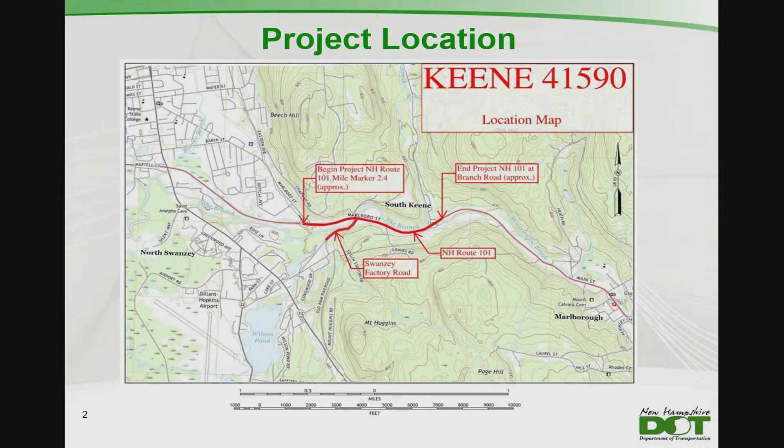It starts just east of Optical Ave, progresses about 1 mile just past Branch Road, and also encompasses a portion of Swanzey Factory Road. We're looking to improve the intersection there, address the bridge condition, the roadway condition, deteriorated pavement, and drainage challenges on that segment of roadway.

So as an agenda for tonight, we have progressed through a couple of these aspects: welcome and introductions. We'll touch a bit more on our project development team. We have worked and collaborated with folks from the City of Keene, the town of Swanzey, and the public, including the abutters as we progressed along. So we'll give a project overview.

We'll talk about our studies to date, which there have been many. We'll talk about our preliminary design, our concept that we've developed through public outreach and coordination with the project work group. We'll talk about our construction plan and our schedule moving ahead.

As I mentioned, my name is Dave Smith, New Hampshire DOT. Not with me here tonight is Hans Weber, our design engineer from New Hampshire DOT. I introduced both Alan and John. We also have Rob Faulkner in the audience, who works for CHA as well and has been integral in our efforts progressing forward with our CHA team.

We've also had great working and collaboration efforts with Don Lucier, City of Keene Public Works Director, J.B. Mack, Assistant Director from the Southwest Regional Planning Commission, and from the Town of Swanzey, Stefan Mayhew, Assistant Town Planner. This is our working group, and it gives us that local knowledge and insight we need to guide the project from a scope perspective, acting as our local support to make sure we're getting the right solution for the needs along that corridor and for any projects we have at the DOT.

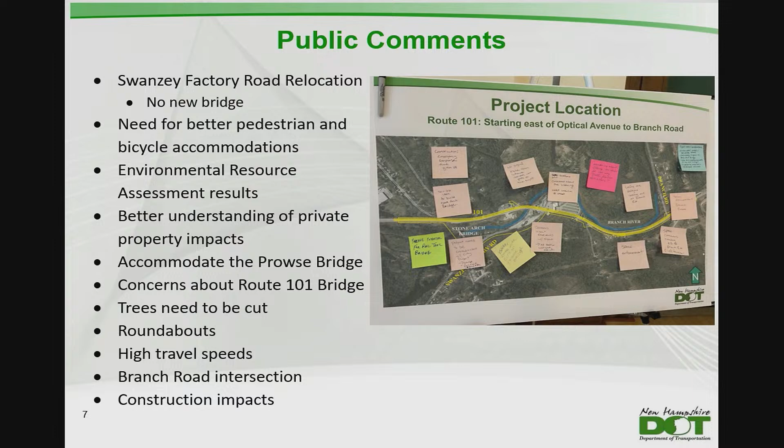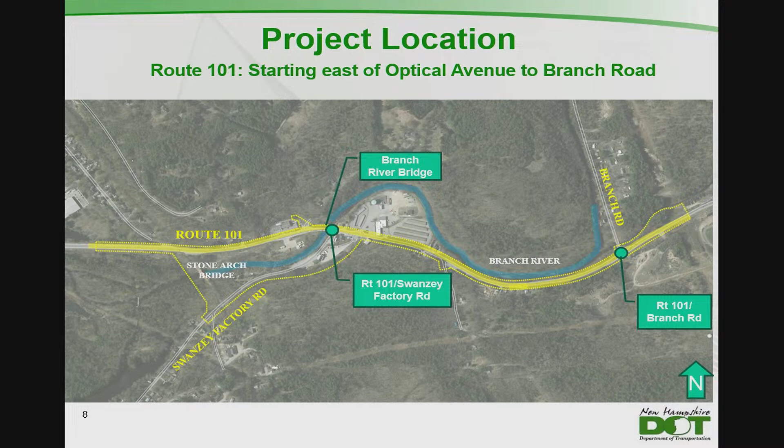As Dave mentioned, the project starts just east of Optical Avenue and continues a mile east to just past Branch Road. There are 2 key intersections in our project area, including the intersection of Swanzey Factory Road and the intersection of Branch Road. We'll be talking about both of these this evening. There's also the bridge over the Branch River that we'll be discussing.

So the purpose of the project is to provide pavement rehabilitation. Currently, there's a concrete slab under the pavement that's deteriorating that we need to remove and build back up the pavement surface. There's drainage improvements that need to be made - currently, there is no closed drainage system.

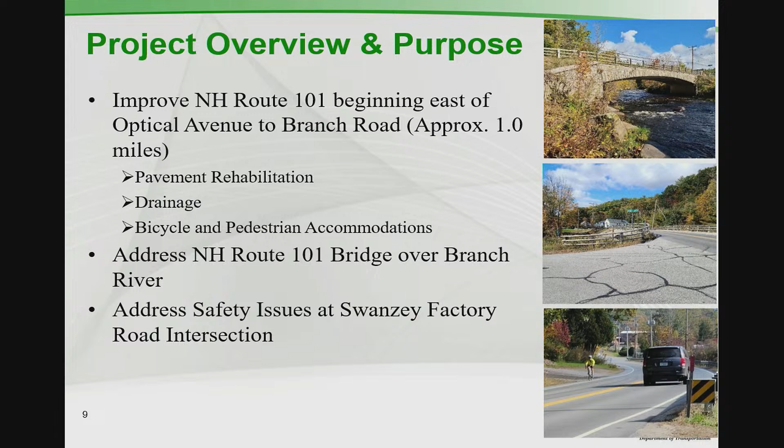We're looking to improve pedestrian and bicycle accommodations along the corridor. We're looking to address the deficiencies at the bridge, and we're also looking to make improvements at the Swanzey Factory Road intersection for safety.

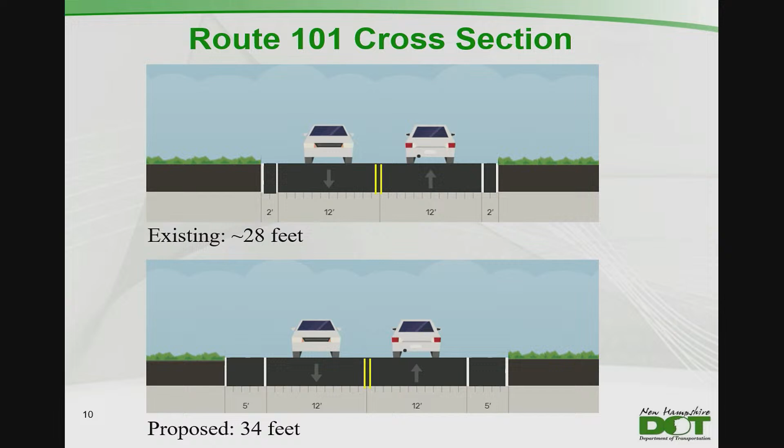So Route 101 is one lane in each direction today. We have approximately 12-foot wide travel lanes with varying shoulder widths. We will be widening the road to maintain those 12-foot lanes, but also add 5-foot shoulders on each side of the roadway.

One of the challenges with this project has been the proximity of the Branch River and the resource areas that are close to the pavement. Also, the private properties that abut the side of the road really give us a constrained right-of-way. As a result, we are unable to provide sidewalks and bike lanes along this segment of roadway.

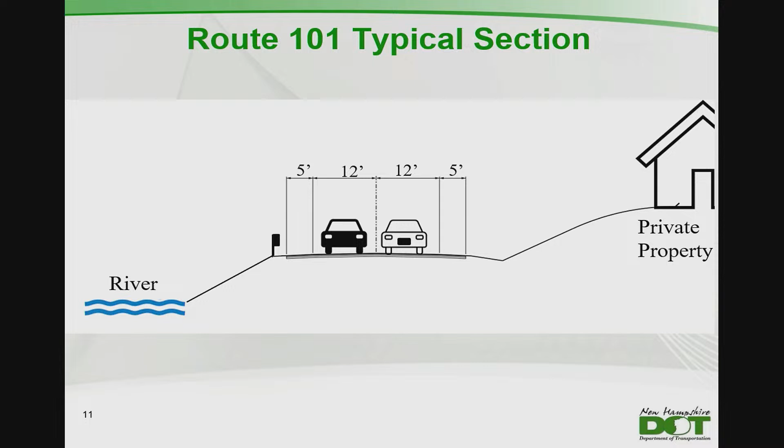It is something that we worked with the working group to discuss, as well as the public. It's something we took a deep dive into. Essentially, due to the right-of-way constraints and the fact that there's no connecting facilities on either end of the project, the decision was made that we would not be providing sidewalks.

At the first meeting, we introduced some ideas to potentially realign Swanzey Factory Road. This included 3 potential bridge locations on the western end. We proposed keeping the road where it is today and providing a signal to improve sight distance lines, and we also proposed moving it behind the fastener mill.

We vetted those options with the working group and through the public information meetings. Essentially, we heard that no one wanted a new bridge, so we eliminated those 3 options. We lightly vetted closing the road, but this was something no one wanted to see, as it's considered a regional connection.

We did develop signal plans to vet alternative 1, keeping the road where it is today. However, with the new bridge structure we're proposing and the proximity of the buildings at that intersection, we decided providing a signal wasn't really feasible either. So we moved ahead with looking at alternative 2, which is moving the road behind the fastener mill.

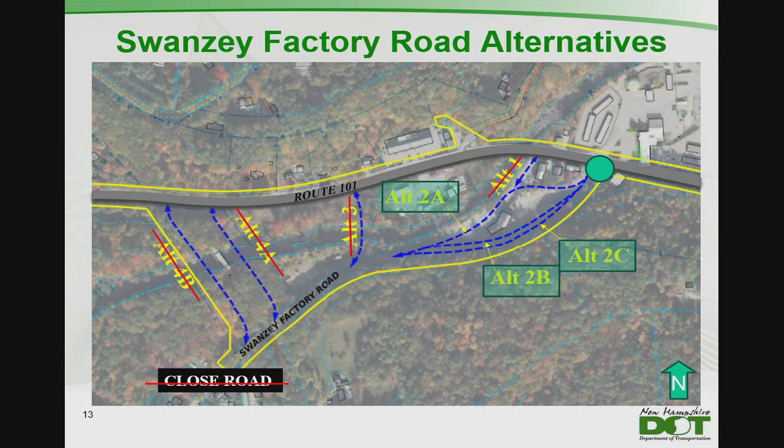Along with John Graves, a property owner there, we developed 3 concepts of where this alignment could go, and ultimately decided on alternative 2C, which follows some of the state's right-of-way along the railroad spur line that used to exist in this area.

So a little bit more about the Branch River Bridge. The bridge is on the state's red list, as Dave mentioned. It was originally built in 1933 and is eligible for the National Register.

CHA inspected the structure back in August of 2023. Generally, we found the concrete to be sound. However, on the underside of the bridge, we did find some staining and signs of deterioration, so we recommended some non-destructive testing.

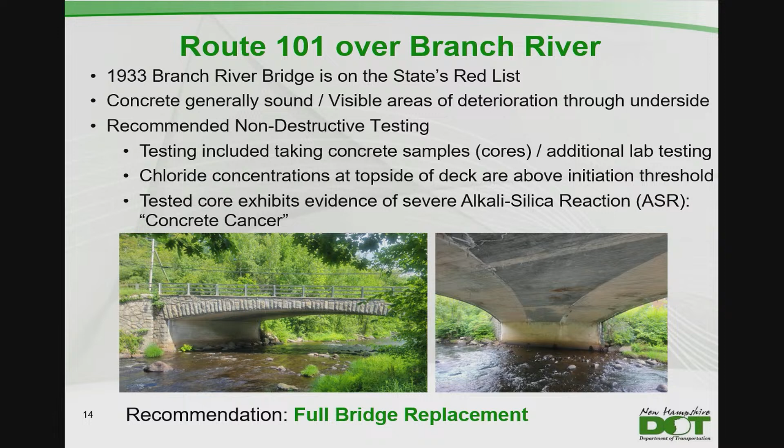So what we did was take some concrete core samples, send those to the lab, and what we found was a high level of chlorides on the decking, and something called alkali silica reaction, or ASR, which is essentially a concrete cancer. With those lab results in hand, we determined that a full bridge replacement is needed at this location.

Next, I'm going to turn it over to John to talk a little bit more about the design in detail.

Do you see the hand on that? No, I'm not sure they can. No. No. All right, all right, thanks, Ellen.

I'm just going to go over the plans quickly. The preliminary plans are 4 slides. We'll start on the west end and then gradually move east as we scroll through. North is up on these slides.

Yellow represents the proposed paved travel lanes. Brown represents the shoulders. Orange represents driveways and access points. Green represents limits of earthwork. Red is locations of homes and businesses, and the wetlands are the blue striped hatching. These are all shown over the aerial image.

On this slide, on the south portion is the existing Stone Arch Bridge. To the north, on the left side of the plan, that's existing Marlboro Street as it comes down and dead ends just before it hits Route 101. So Route 101, the project starts just west of the Stone Arch Bridge.

As Ellen mentioned, 12-foot lanes and 5-foot shoulders. There's a little red crossing, I don't know if you can see it. That's the future location of the Transportation Heritage Trail as it crosses over Route 101, utilizing the Prowse Bridge that the city has purchased from the state.

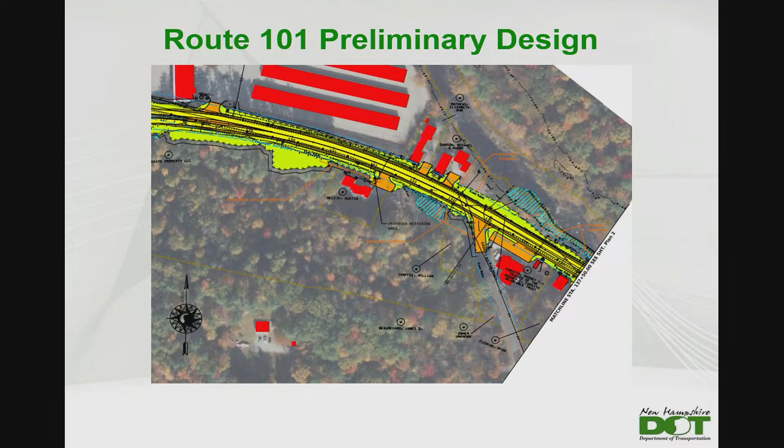This stretch, we are pretty much holding the same horizontal alignment in this area, but as we move to the next slide, the Branch River still is to the north of 101 along this whole stretch until Branch Road, which is off to the right, that roadway going to the north.

We are proposing to shift the horizontal alignment 3 or 4 feet to the south in this location as well, trying to minimize or eliminate any impacts to the floodplain and wetlands along the Branch River. Through this, we'll probably need to add about 5 retaining walls in front of the homes in that area to minimize impacts to the residences.

And as we continue east, we have a left turn lane proposed for eastbound traffic turning onto Branch Road. Currently today, there's a widened shoulder where people pass cars waiting to make that left turn, a little dangerous situation. This will be a safer alternative. The project ends just east of Branch Road as we taper back down from adding that turn lane.

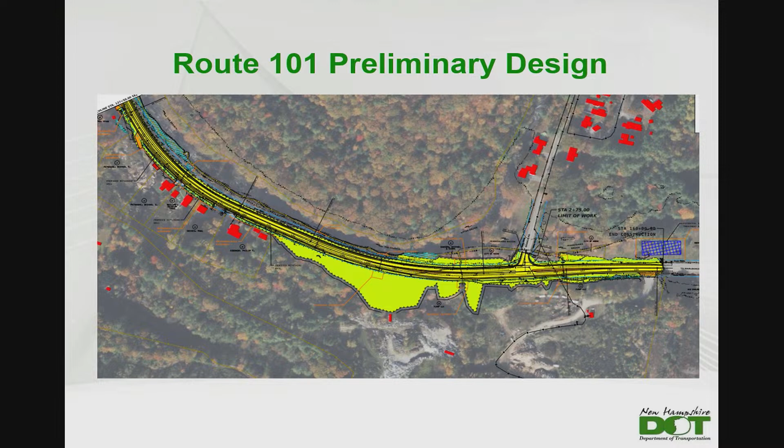So this slide has our best management practices, some potential stormwater mitigation areas. This shows the whole project area. So we have one location to the west at the beginning of the project, around where Marlboro Street ends at Route 101, so that could be a treatment swale in that location.

We're also showing a couple potential locations along the existing Swanzey Factory Road that's being discontinued. Those can be either a treatment swale or a detention basin of some sort. And then we also have a potential BMP to the east of Branch Road, and that will most likely be a basin. There is an existing stream that continues in a closed system in the area of the Coran Building. At this time, we aren't proposing any changes to that system.

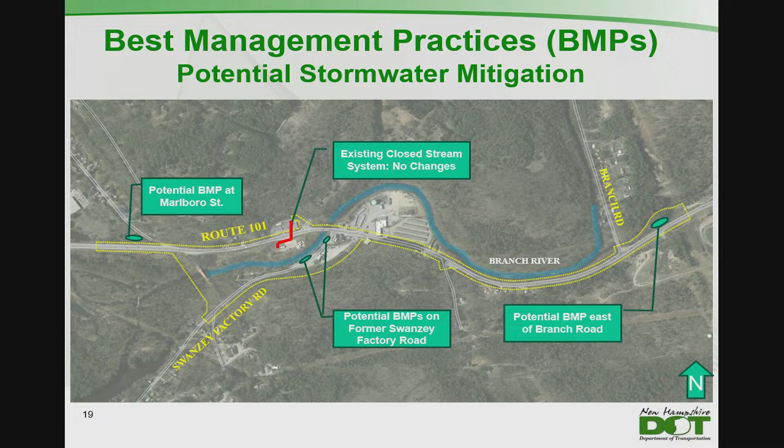So we expect construction to start in the spring of 2027. It'll last about 2 years. We've been working closely with Don and his team to discuss reconstructing the water line through this portion of road as well. During construction, we do anticipate that we can keep the road open to traffic.

However, at some times we will need to have alternating one-way traffic. We expect to have a temporary signal to control traffic during these times. We may also need to detour traffic, and this is something we're just starting to look at. We would detour traffic down Swanzey Factory Road and back up to Main Street.

However, we do understand that there's limitations with the roundabout there and the capacity of that roundabout. We do think that some folks might use Branch Road if they're headed into downtown to bypass the construction. However, this is something we're continuing to look at and something we'll continue to work with the city on as we move forward.

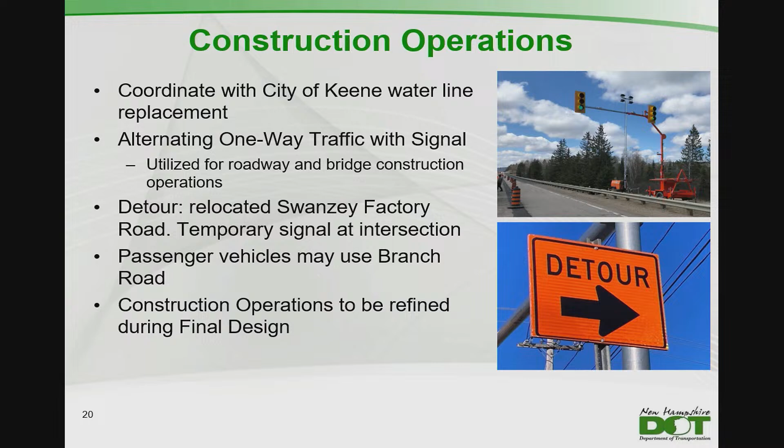So we did conduct a bat study this summer. We did an acoustic survey. We did find 2 species of concern. We found the northern long-eared bat, which is endangered. We also found the tricolored bat, which is proposed to be endangered.

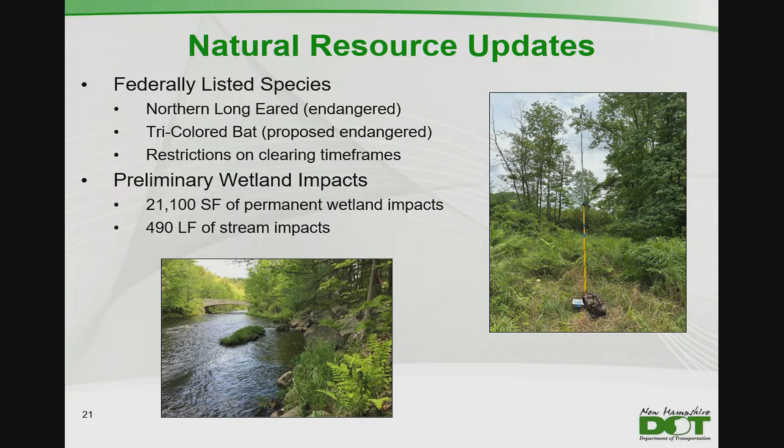Essentially, this means we will need to have some limitations on when we can do clearing during construction. As far as wetland impacts, there will be approximately 21,000 square feet of permanent wetland impacts and 490 linear feet of stream impacts with the project.

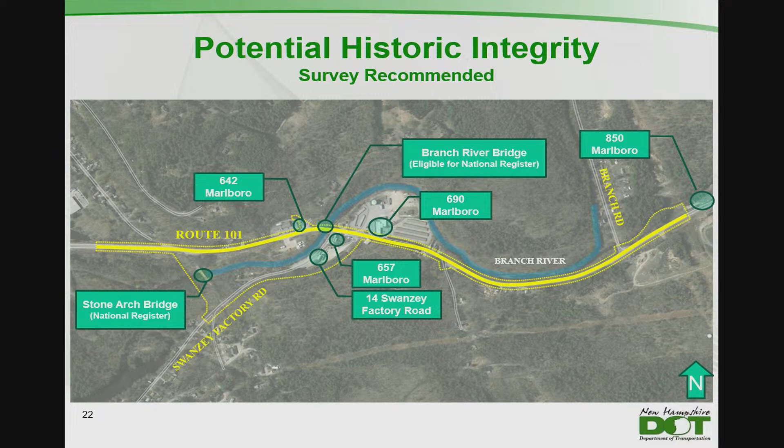So our work to date has also included an architectural survey plan. The properties noted here could potentially have some historic integrity. We are moving forward with additional survey of these properties. Right now, our project is seeking to avoid any impacts to those properties, and we will continue to be mindful of them as we move forward.

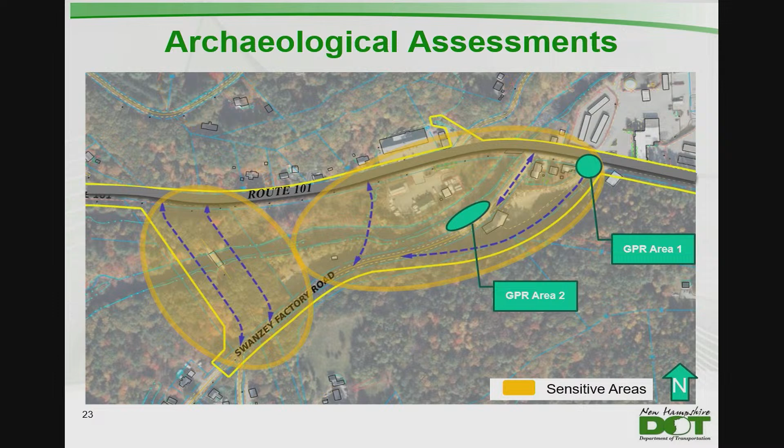Area 2, adjacent to the Branch River, is essentially filled area, and we didn't have any findings there. GPR Area 1, shown here where the roundabout is, could potentially have some structural remains associated with the former mill uses, so we propose to continue to monitor that location during construction.

Continuing with the environmental aspect, there's a lot of requirements we're complying with because of the federal funding of the project. It's an 80-20 split between federal and state funding. One of those requirements is the development of a NEPA document, a National Environmental Policy Act document, which captures all of our environmental aspects and ensures we're compliant with all those rules and regulations.

Specific to Section 106 of the National Historic Preservation Act, it offers the public an opportunity to be engaged in the project as a consulting party, guiding awareness and insights for that aspect. We solicit this opportunity at all of our public meetings. If anybody would like to be engaged from a Section 106 consulting party perspective, they can contact me, and I would put them in contact with our federal highway representative for that coordination and involvement.

So we're progressing along. Ellen, I think we'll also talk relative to our environmental status here, but we're progressing along relative to that.

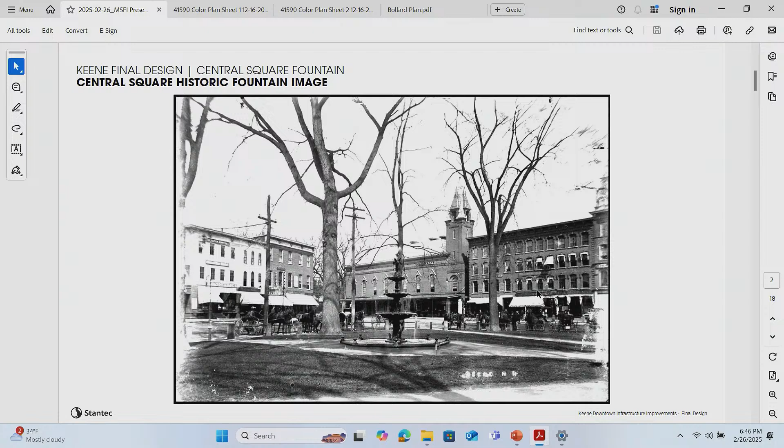So what we're calling option one would be a new fountain located in the center of the central circle, in the center of the square. Again, we were able to find a kind of off-the-shelf product, called a Caesar fountain. It's produced by Robinson Iron, very similar to that historic fountain in the photograph.

We're also considering reusing the original Einbeck stone, which is the perimeter, the whitish granite around the perimeter, kind of the octagon shape in the existing fountain. The center portion would be removed and replaced with this cast iron feature. The water bubbles up through the top and then cascades through those various dishes or bowls down into the base of the fountain.

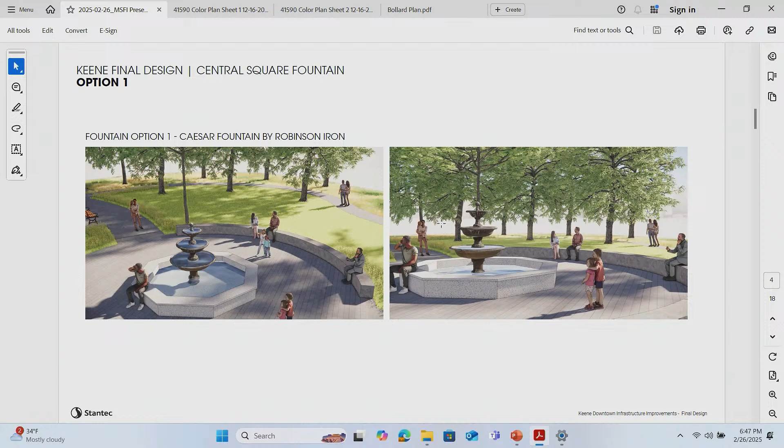So this is what it would look like in a perspective view. We're also proposing to include a semicircular seat wall along the eastern edge of the circle, to kind of provide a backdrop to the fountain, but also to orient you to the bandstand, the gazebo. So if there was a performance happening at the gazebo, you could sit at the fountain wall or you could sit at the seat wall.

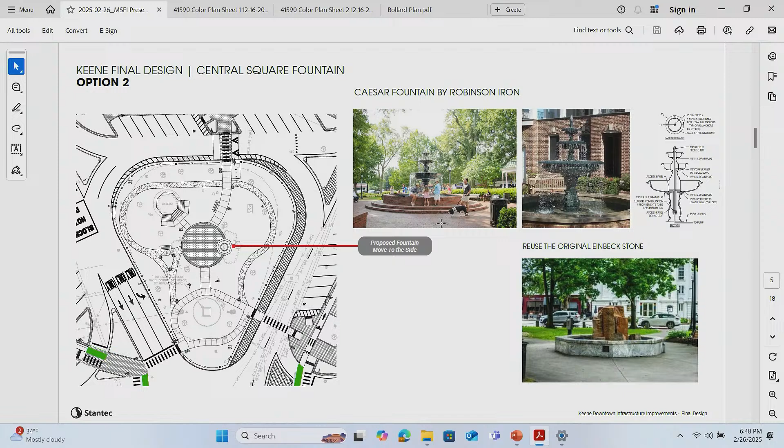The second option was actually looking at relocating the fountain to the edge and incorporating it into the seat wall. Again, it would be very similar - we would relocate the existing granite at the perimeter, at the existing fountain base, and incorporate it into that seat wall shown in the previous version. The cast iron fountain would still be proposed in this option as well. This is what that would look like.

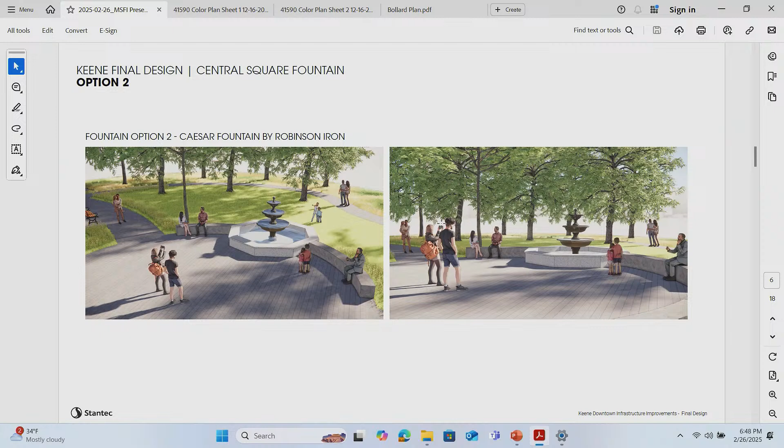So again, it frees up, provides multi-use space in the center of that circle, puts the fountain off to one side, incorporating it into a seat wall. One of the things that we would need to look at is some of the existing granite pieces on that perimeter, on that existing fountain base, are cracked - and would we damage it further by removing it and relocating it, or even the pieces that aren't cracked? So that was one thing we'd have to look at in more detail.

But there was a lot of appeal to this in terms of having it offset from the center and as a separate feature. So those are the two options that we've developed to date.

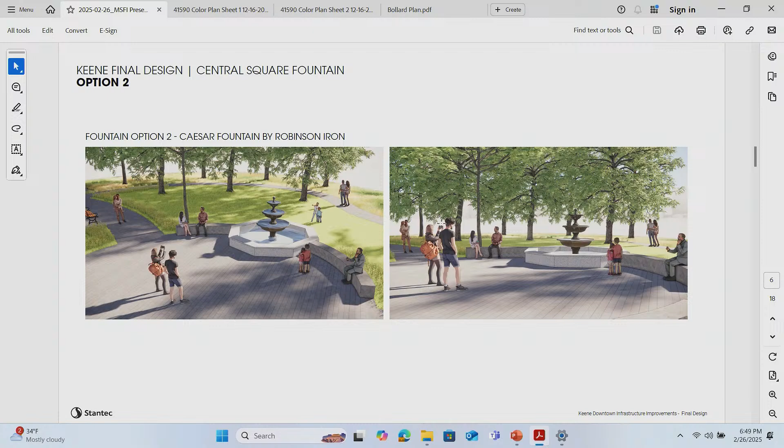So I'm going to jump in here and take Bob off the hook a little bit. I know this was discussed previously during the project, and I think the committee certainly expressed a preference that the fountain stay where it is. I asked them to put this on tonight's agenda because I would like to take one more crack at it.

I think it's very appealing, this concept, in that it frees up the space in the plaza for events and whatnot. It also creates a much more usable space for viewers to be able to sit and watch the events happening on the bandstand. So I know that you've already expressed an opinion that the fountain should stay where it is, but I'm hoping that these graphics will convince you to think about that option.

Well, Mr. Director, your comments are very, very convincing. However, I like option one. I liked it before. I like it even better now. Hearing that it would retain the existing granite sounds like a cost saving also by doing that.

Committee, any comments? Agreeing with my chair on this one, keep it short and sweet. Councilor Tobin? I do actually kind of like it off to the side, personally. I don't have a strong preference, but that would be my take.

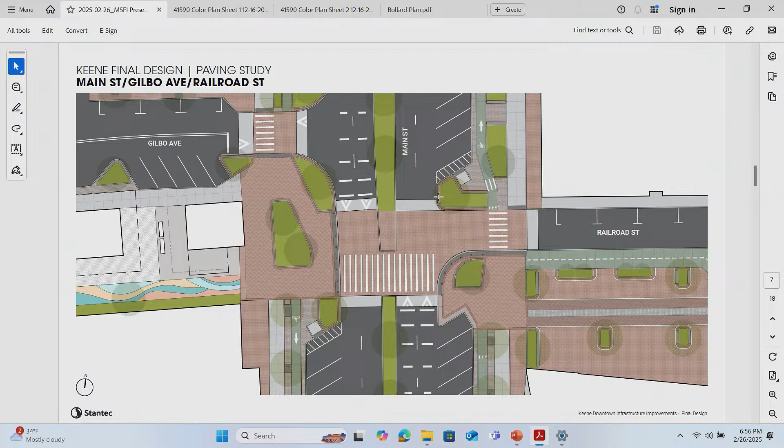Our preliminary idea was to come up with a series of different patterns and colors of concrete. There's a whole myriad of different colors available, and a whole myriad of different patterns available. We were trying to focus more on a traditional herringbone, kind of a brick scale herringbone system.

Again, these are all just stamped and colored, and we would do different colors and patterns for the different pedestrian zones. So, for instance, the intersection has the multi-use zones at the corners. We have the buffer strip between the bike lane and the parking, the furnishing zone that's between the planters, and the commerce zone along the face of the buildings. These would all be a little bit different, but be in the same vocabulary of color and patterns.

One of the other concerns we heard was for the bike lanes, having those painted the bright green color, the typical standard bike lane color. There was a lot of discussion about whether, I think the vote was to have it concrete, and if it was going to be concrete, are there opportunities to have that as a colored concrete? Don just passed around a couple of green type samples. They're a lot more muted than that bright green color, but those are a couple of options for colored concrete that could potentially be used for the railroad, for the bike lanes.

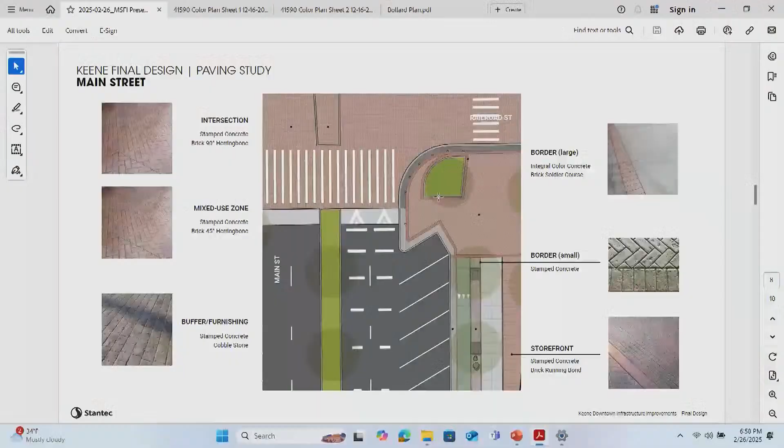The other thing I'll say is, in terms of the different textures and patterns shown on the graphics here, we're not asking you to make a vote or pick anything tonight. All of these patterning details are within the umbrella of what the council has already decided. If you have a strong opinion, we'd love to hear it, but otherwise I don't feel we need you to pick a specific pattern. There will be some patterns done with the samples we're planning for later this summer.

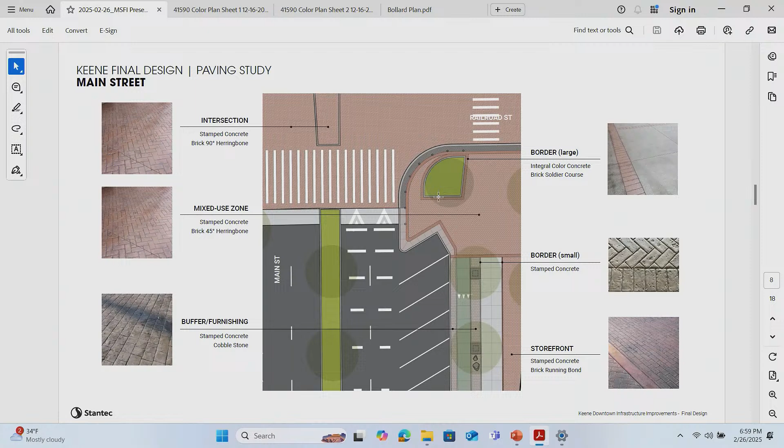Okay, my colorblindness is such that I thought those two were the same. They're actually very similar, yeah, in your defense. But a larger sample, I think, would be a great planning idea.

To do a couple of sections of like 5 by 10, different sections, different colors and patterns, and also one of natural, the base. We'll probably do one of the greens, a couple of different red-brown tones, and one just plain old gray concrete. This is just discussion, no decision, just wanted to show you kind of how it's progressing.

Good, thank you. Just a quick question - when you do come back with this, I definitely want to know any cost differentials, because it is time to tighten the belt on this project. Understood, so that'd be my main concern, two things. One, keep it smooth, because you don't want people that are handicapped, have a handicapped vehicle or walkers or whatever, to go through the old pavers we used to have. So keep it as smooth as possible, and the other thing is keep the price in line and let us know the difference. Yep, thank you.

Okay, anything further? Good. Okay, next, onward. Oh, we did have a slide on railroads, it's the same. Yeah, no, I think keep going.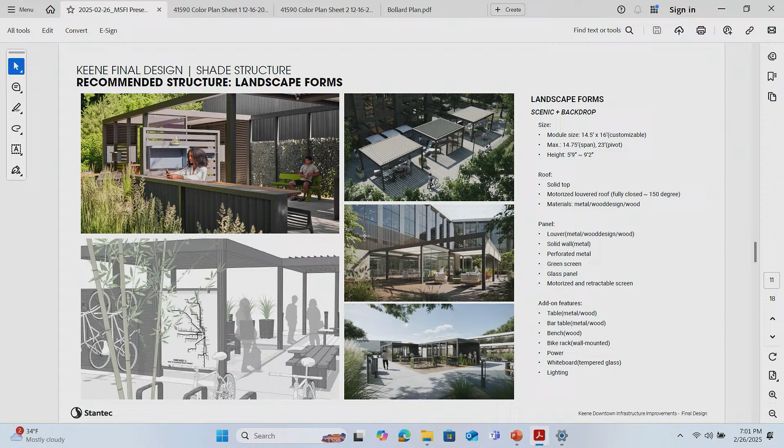So what we're currently proposing is that we would have two of these structures side by side, but then offset slightly for interest. And then there'd be a small area that would not be covered, would be a freestanding rail, potentially with an interpretive panel included into it. That would provide a little bit of vertical separation between the bike path and this structure. And this structure could include fixed seating, flexible seating, covered bike racks, or bike racks that weren't covered.

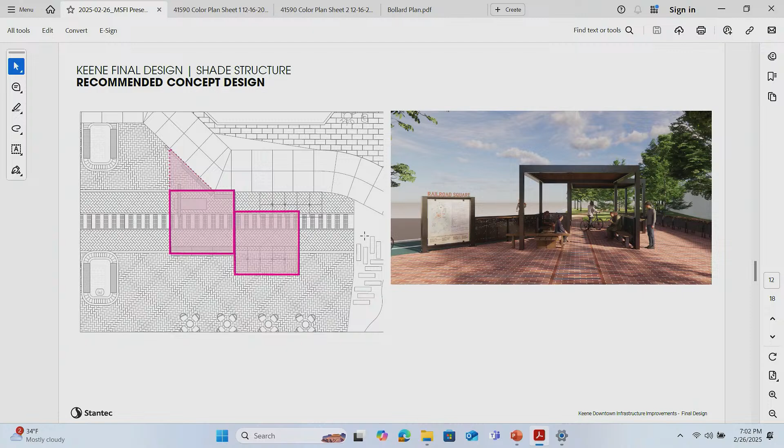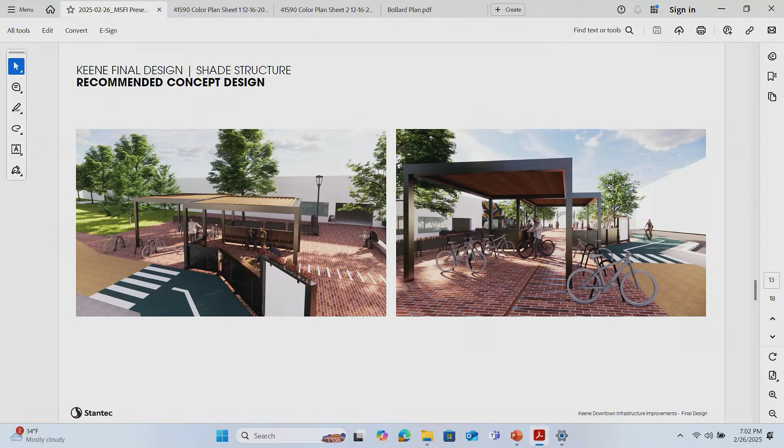So just a couple of views - the view on the left is if you were kind of standing above the bike trail, looking back at it, you can see that freestanding railing in the front. That interpretive panel would probably be two-sided. And you can start to see in both of these images there are bike racks that are under the covered area and bike racks that are outside the area. So that's one option for consideration.

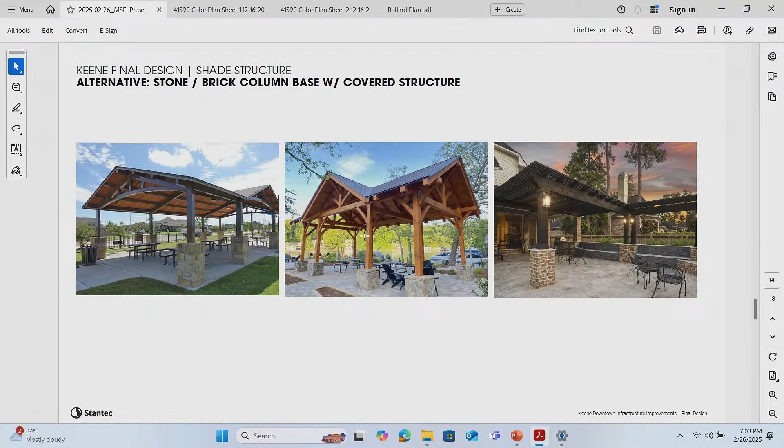We also looked at the idea of doing something that's a little bit maybe more traditional in terms of its character and style. These all have kind of a stone base with wood structure, metal or wood roofs. So these would potentially be a little bit more in keeping with the architectural style of downtown Keene, and they are modular to some extent and customizable depending on what the product is.

And then another option are these tensile cover structures. So basically there are these fixed posts with these canvas structures that span between the posts. There's a lot of different colors, styles, and details that you can use for these types of systems.

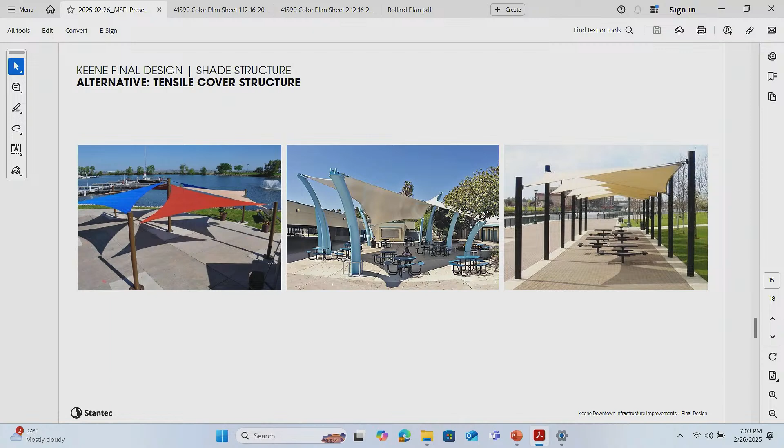Then the last option is similar to the first option, but a little bit more simpler, where it would just be kind of a wood structure with a metal frame. And again, there's a lot of these that are kind of off-the-shelf items that could be used in this situation.

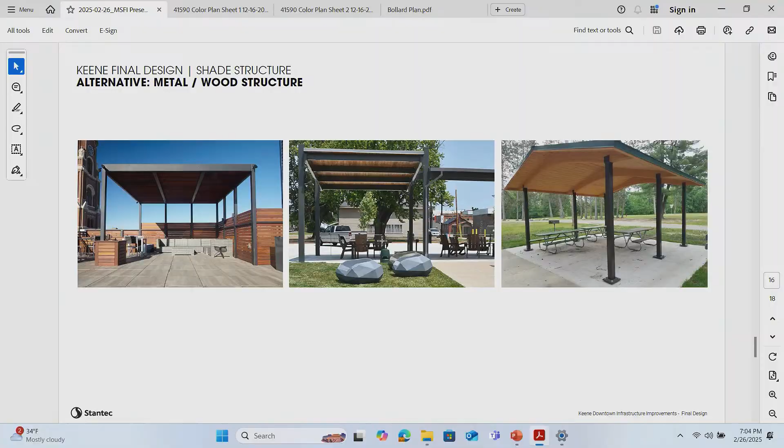Counselor? As I said at the full council meeting, I can't favor any of these. I think these are an unneeded expense to the taxpayers. I think we've told them as a committee that we're going to do what needs to be done and not really extend beyond anything else. If a nonprofit group wants to come in and do a fundraiser and build these, that's fine. But once again, I can't justify this to the taxpayers who are already on the hook for this, and we don't know what the exact dollar is going to be, but I think this is just a frivolous waste of money.

Understand your hesitation, Counselor. The vote of the council was to include this structure as a bid alternate, so we're basically looking for some guidance as to what structure gets included as that bid alternate. Well, you heard my words of guidance.

Yes, Laura. I like the first option, the modular option with what we're calling the leaning rail. I would go for that one.

Yep, Council. Two comments. First, I like this final alternative, which I think is the simplest, and probably closer to what we need. Second, the council was divided over the inclusion of one shaded structure. I'm not sure the council is going to be interested in two offset with the leaning rail and all of that.

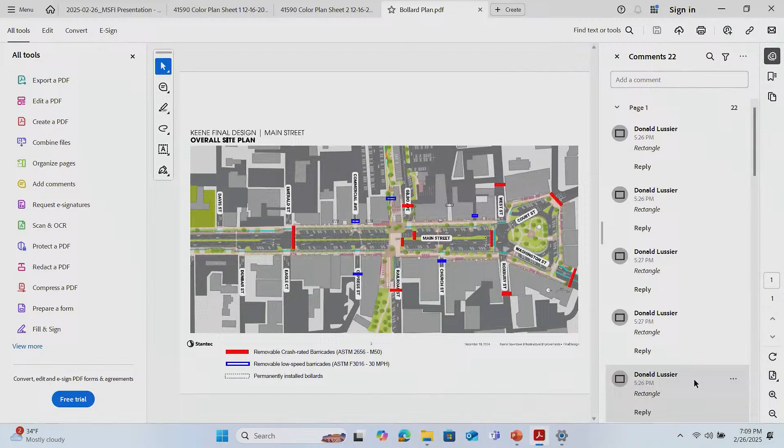Now, let me take a step back. We sat down with the Highway Department and the folks at Keene PD to look at what we would need to do in order to accommodate all of the different events and have some flexibility.

So with this graphic, the solid red bars show where we would install high-speed security bollards. These are rated to stop a truck going 50 miles an hour.

You can see, I don't know if you can see if I use the pointer here. No, I don't think so. Can you? Oh, you can, good.

There's different areas where these would be installed. You would obviously see them at the perimeter, but for example, here at the head of Main Street, we would install them. The idea is to give flexibility for the different size events that have to be accommodated. Some events might only require security around Central Square. Some might require Central Square and the northern part of Main Street. Some require, like the Food Fest, go all the way down to Emerald Street.

So the red solid bars would be the high-speed, high-security bollards. The blue outline shapes that you see, like here on Church Street or Cypress or Commercial, those are a slightly lighter weight version. They're designed to stop an automobile going up to 30 miles an hour. It's not quite as heavy duty, but we could use those in areas where a heavy duty truck doesn't really have an opportunity to get going 50 miles an hour. So we could save a little bit of money there.

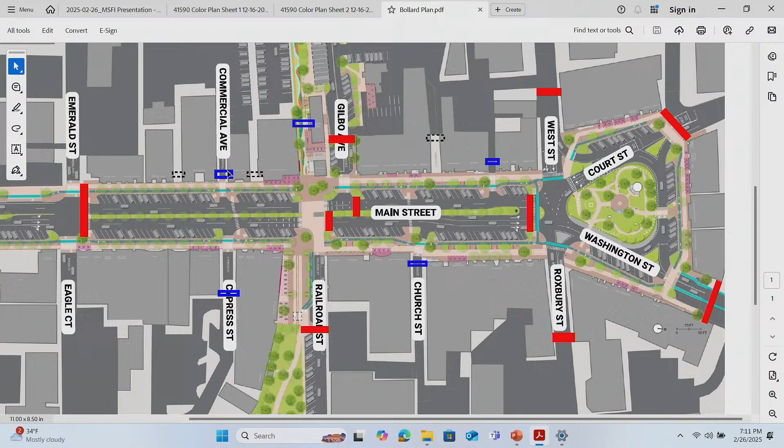And then the third thing, you see these areas with dashed boxes. This is where we can get away with simply a permanently installed fixed bollard that wouldn't be removed, but we don't need to get vehicle traffic through there. It's just for pedestrians and bicyclists, and a bollard in the middle, for example, of the bike trail next to the transportation center will be able to solve that need.

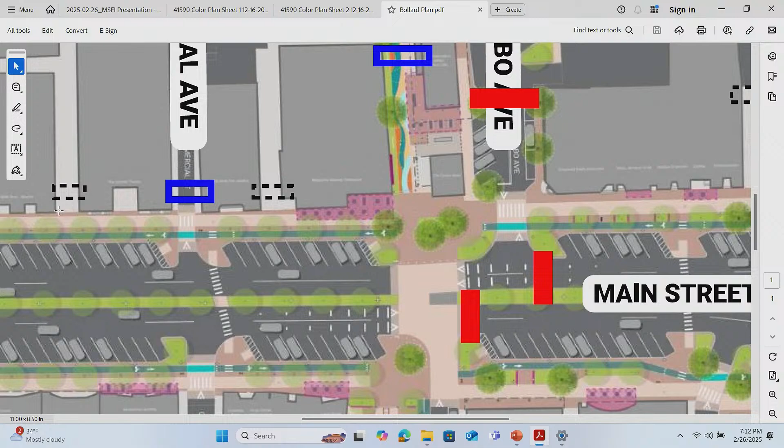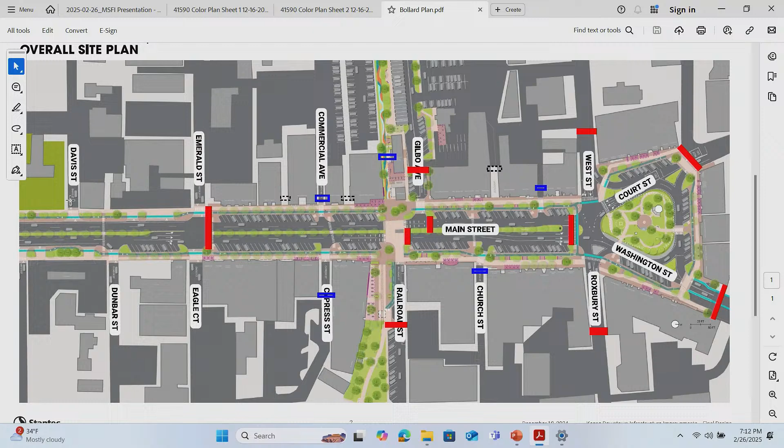So altogether, we would require about 154 bollards in order to complete this plan as it was designed by the Highway and Police Department. Each one of these is costing over $3,600 just for the materials, not including installation. With installation, those bollards would add up to about $715,000.

Unfortunately, I can't give you a quote for these tonight. We've reached out to the vendor, but we haven't gotten a price back yet. But these are stored off-site. There's nothing below ground, no construction below ground. Basically, they're large steel devices on wheels. They can be rolled off of a trailer and placed in the roadway. They're chained together so that they can still stop a truck with minimal amount of impact or intrusion into the event zone. So they are intended for event security, but we expect they're going to be considerably cheaper than those built-in models.

My suggestion for tonight, and again this was something we were directed to include in the bid documents as a bid alternate, my suggestion for the council is to eliminate the built-in bollards. They're really just cost prohibitive. Instead, if we want to go forward with the deployable version, there's no reason to have that as part of the bid for this project. If we want to try these out, we can buy a small number, try them out in a few locations, see how we like them, and if the council wants to keep moving forward, we can buy them over time. But I can't recommend spending nearly $1 million on bollards.